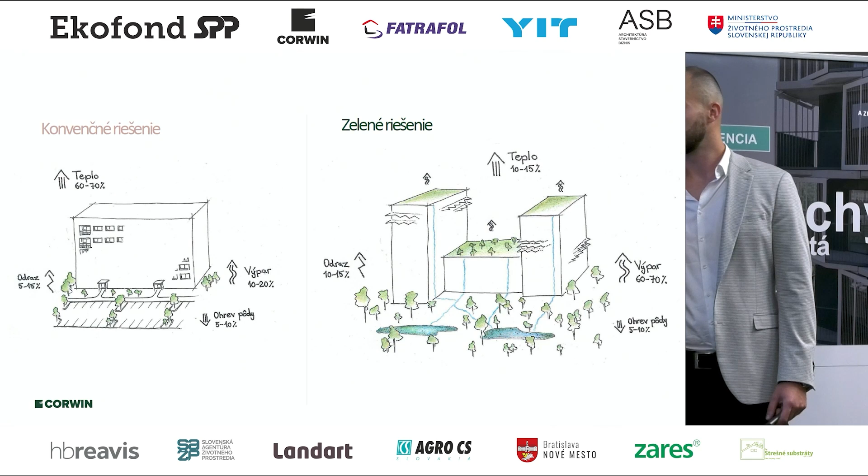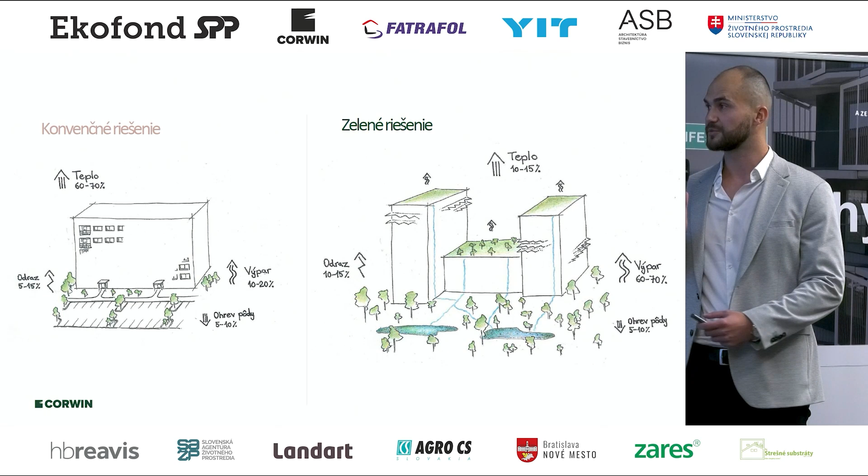Within green infrastructure, we are interested in benefits, which is cooling of the city space, improving the quality of the soil and air, and preventing various extremes of climate. These are benefits I don't need to introduce to you specifically, but maybe a practical solution is that we try to quantify the use of green infrastructure in our project directly, and also compare it with a normal, usual solution of older construction.

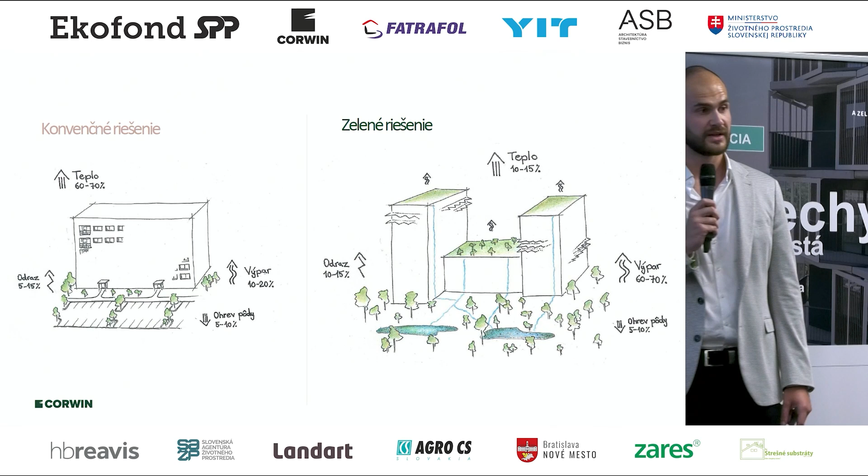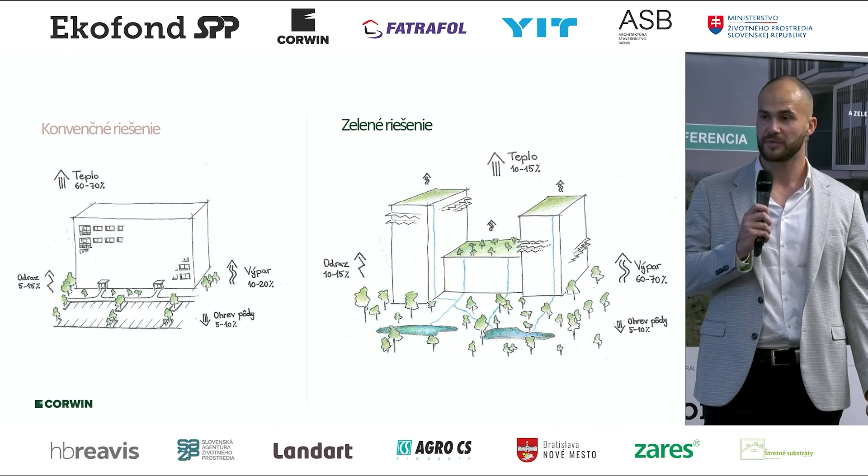So we used green roofs in combination with rain gardens and also some absorptive containers, so that we can retain all the rainfall and that then evaporates, and we thereby cool the environment and the building.

Since this conference is about green roofs, I would talk about the green roofs that we have made in these years. We have made extensive, intensive green roofs. We try to make those accessible also to our tenants.

The benefits of green roofs: elimination of heat islands, decreasing temperature extremes, reduction of CO2, purification of the environment when it comes to dust, and also keeping or maintaining biodiversity.

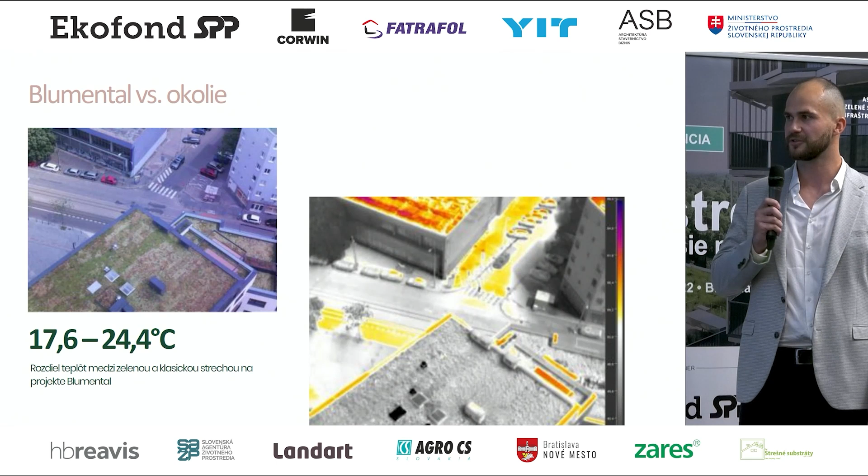We have calculated the difference between regular roofs, which is the student house of Bernolák, and this is our roof from Blumental, and the difference between the classic roof and the green roof was from 17.6 to 24.4 degrees, which is quite a lot.

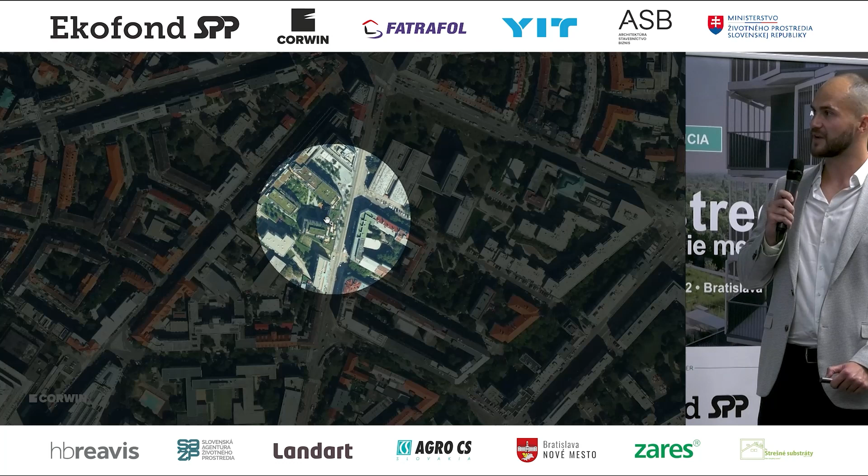And the side effect of green roofs on Blumental is that from bird's eye view, the character of Blumental is different, and it reminds of Kmeťovo Square or other polyfunctional projects. From the perspective of green infrastructure, we also supported the restoration of Kmeťovo námestie, or Kmeťovo Square.

It's quite a nice park that is now available for moms with their kids. We have also restored and restructured pavements, and...

And this Einpark was of another, higher level. It is the greenest office building in Slovakia. It's the building that has been built with platinum certification, and it will be the only building in Slovakia that will have LEED Zero Carbon.

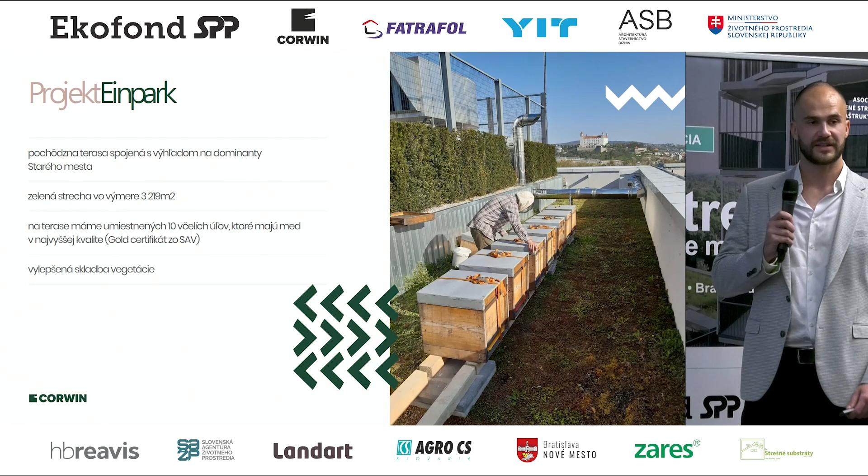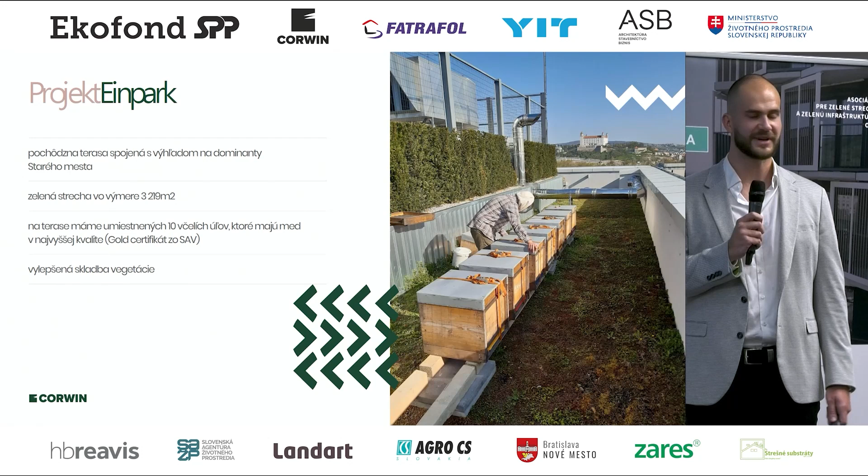We used a better combination of plants that have been placed there, as one of the previous speakers said. When it comes to quality of honey, on this roof we also placed 10 beehives, and we checked the quality at our Slovak Academy of Sciences, and we got the certification of gold award. So this honey is also here. You can try it out.

You can see that the side effect of that is that every year when we are extracting the honey, we get very interesting knowledge about how to do it.

Another project, Good House, is being completed at the moment, and we have again used all the accumulated knowledge from previous projects. The added value was the combination of green roofs and rain gardens, whereby we supported the evaporation of retained water into the surrounding environment, and thereby supported the retention of wetness and cooling of the environment.

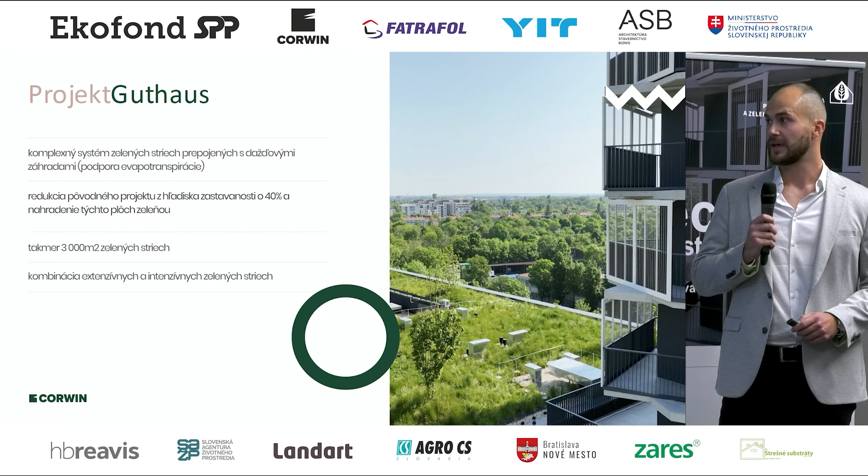We bought the project together with the territorial ruling, but then we reduced the built-up area by 40%, and all that percentage was allocated to greenery. So here all the greenery requirements were exceeded. There is a combination of intensive and extensive green roofs, whether over the building or over the garage.

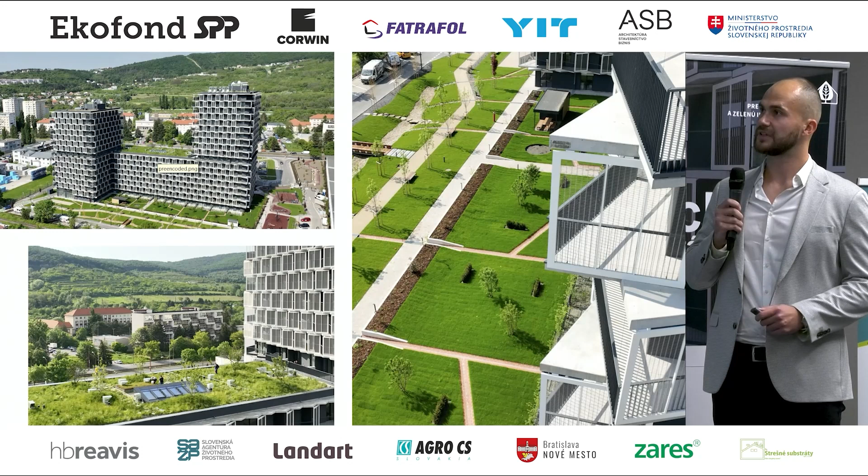For future clients, but also visitors of Guthaus, we wanted to teach them something, and all of our green roofs are at the higher levels. This intensive part is also on the B block, and all the drainage system is let out at the bottom, and through these water channels they go to the rain gardens.

If you are there a couple of days, you can really see how it all beautifully works out, and you can educate yourself on how this climate solution works. Why should we do all of this? Climate change is inevitable, and green roofs offer one of the solutions for how we can eliminate the changes in climate, torrential rains, or pollution, and so on.

So these were our projects that have been implemented, and now I'm going to talk about the projects we are preparing, where we are accumulating and using all the knowledge to get to a higher level. Project Palma is the biggest project we are working on.

We have quite big ambitions when it comes to sustainability and energy design. We want it to be some kind of a role model for sustainable buildings in Slovakia, and we would like that on our main square, which we call the heart of Palma, to place a rain garden so that people get to know what it is and how it works.

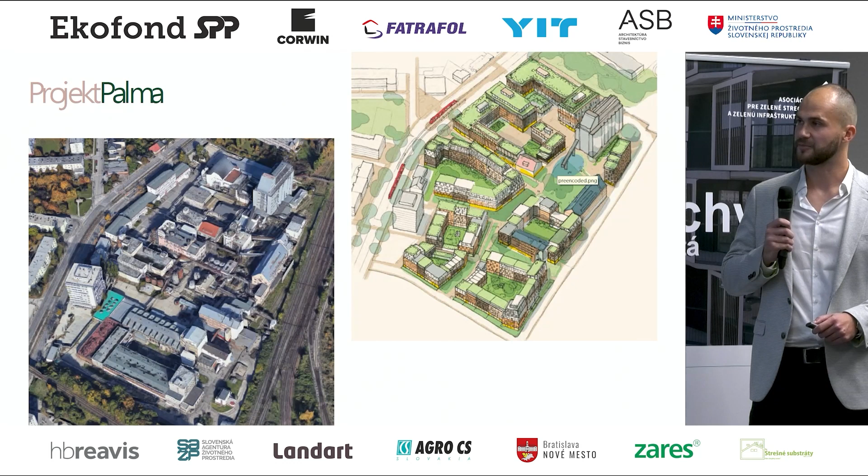It's actually the change of a former industrial area into a new local city area and its center. So from the perspective of ecology and sustainability, it will be a great benefit for the environment and the surrounding neighborhood. The previous greenery was at the level of 2%, and anyway these were just feeble trees.

Another project we are starting to implement is the Vilharia project. It is located in Slovenia, in Ljubljana, and we are changing the existing parking spot into our new headquarters. It will have LEED Platinum certification, and all roofs on this object will be green and walkable, and also available to tenants or to the public, because there will be restaurants.

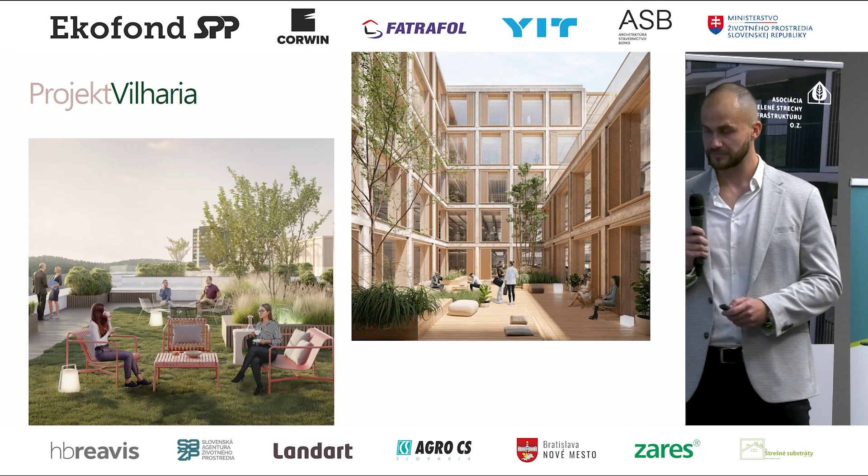I would finish this presentation by asking how we can create green infrastructure altogether, and how we can increase the popularity of these solutions. We already mentioned it a couple of times - this is education and increasing public awareness of what green roofs are. How can we help ourselves, and how can we help the cities?

Please, let's focus on the quality of the greenery, not the quantity, because when we create parks or greenery within our projects, we are always thinking about whether, when we hand it over to the city, how are they going to take care of it. Because it's not just about making it, but also the maintenance of it.

And also when it comes to support for the public, and indexes of greenery, this should be a motivation and attractive to developers. And the motivation on the higher levels through the municipalities that want various rules or reliefs, and how to bring more green infrastructure. For example, in Paris, every single building has to have a green roof.

So these are the solutions, or maybe other solutions. Through these conferences, where we talk more about green roofs, we can have more green infrastructure in the future, and we can talk about how we all managed it nicely.